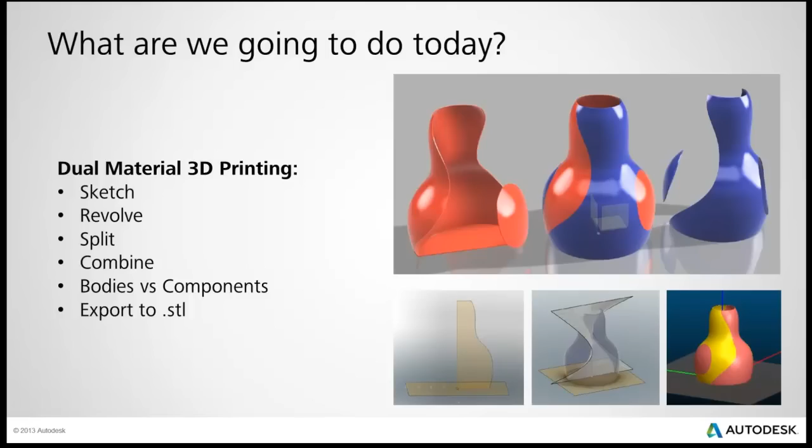So what are we going to do today? It's a class on 3D printing, and we're actually doing a dual material 3D print, which I've never done successfully myself, but James has gotten a lot of practice at it. A lot of the things we're looking at, I won't say difficult, but they're some of the more advanced features someone might use inside Fusion. Other than sketching to create something, we're going to use the Revolve command to create geometry, the split and combine commands to make cool shapes like in the images to the right. We'll talk about differences between bodies and components, and of course exporting as an STL file, which is necessary for your 3D print.

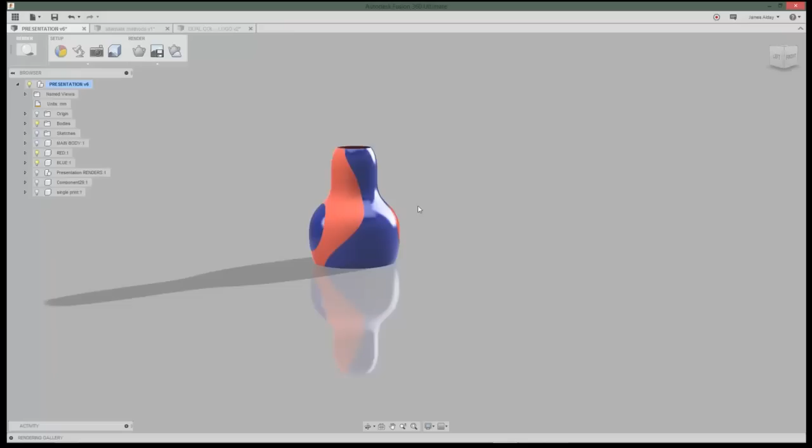So basically, we're going to build a 2-color vase. This can be 2 colors, 2 materials. It's going to be composed of 2 STLs that we're going to export that look like this. And from this, you'd put it into your slicer, and you'd have a dual color print.

Very simple design. I know this is another vase. People are like, oh, not another vase, but trust me, it's all about the technique in building this, and you guys can use these techniques to build whatever you want. So let's get started.

Let me actually start with a new design. That might be better. I'll just follow along with you guys. So what I usually do, and this isn't necessary, but when I was first starting out with Fusion, I'd like to just draw my work area, my printer bed. Again, not necessary, but this might help you guys out later.

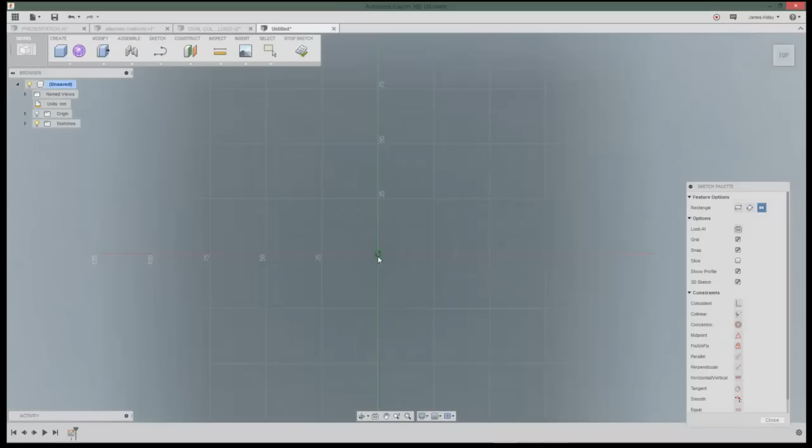So my current printer bed is 200 by 200, which is an 8-inch printer. This will just give you a good idea of the area you're working with so you don't get too crazy. And if you don't want this, you can always turn the sketch off, not a big deal. So let's hide some of this stuff so I can see.

All right, so we're going to start out really simple. Go to our front view. And then what we're going to do is sketch out the vase, so we're going to make something that looks like this. This is the goal of the first step, is to simply sketch out a profile of our vase.

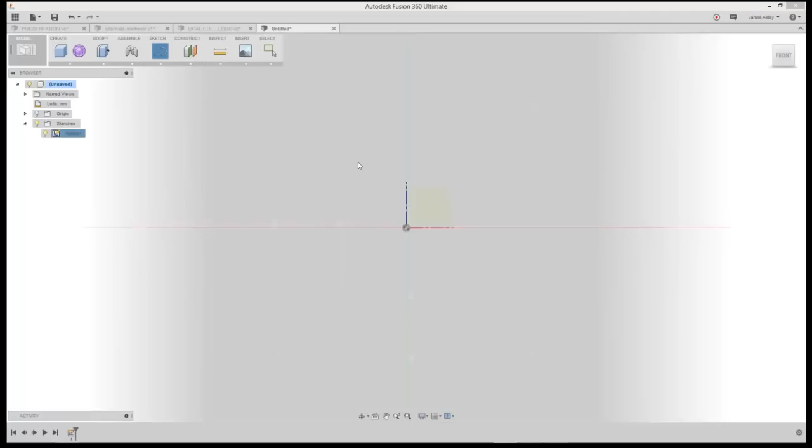So to do that, again, go to the front view. We're going to click on Sketch. We're going to select the line tool, and we're going to click on this work plane. Now that we can draw lines, we're going to start at our center origin and go up about 150 millimeters, should be good, since our print bed is 200. And again, you guys don't have to go exactly with these measurements.

You don't even have to make the exact same looking vase, because the whole goal of this is to split it and make a dual model at the end. So you don't have to follow along exactly. All right, so we're going to go over about, I think I said about 30, somewhere in that area, should be fine. And then we're going to stop.

We're stopping because I need a spline. So now we're going to click back on our sketch. Click at the top, which I lost my line. See, I'm already making mistakes.

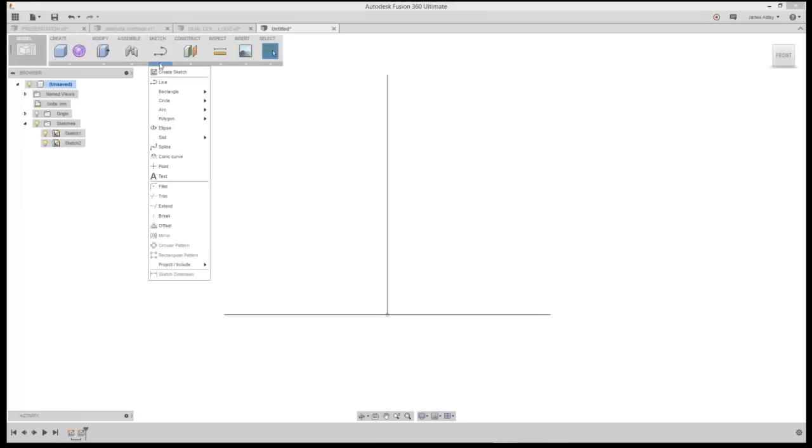You know what, let's do it this way. We can go back to spline. If you guys already drew the line, you can continue on the line. If not, we're going to draw straight out. And if we double click, we can start at this spot. So now we're going to do a vase, come down to, we're going to double click.

Okay, so we have a really ugly looking sketch here that doesn't look like a vase at all, but it's fine because we can just move stuff around. So we're kind of close to what I initially wanted to make, which was this design.

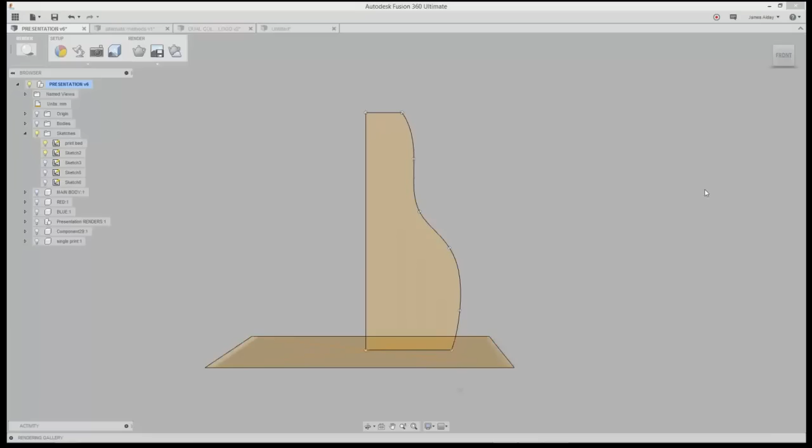So does everybody pretty much know how to just sketch out basic shapes? Is everybody following along okay? No questions so far, so I think you're doing it right. Yeah, pretty easy. Okay, so good.

I'm just going to throw this out there, James. That double click to start at the new point, that's the kind of stuff people log in for. That's awesome. Yeah, let me go over that.

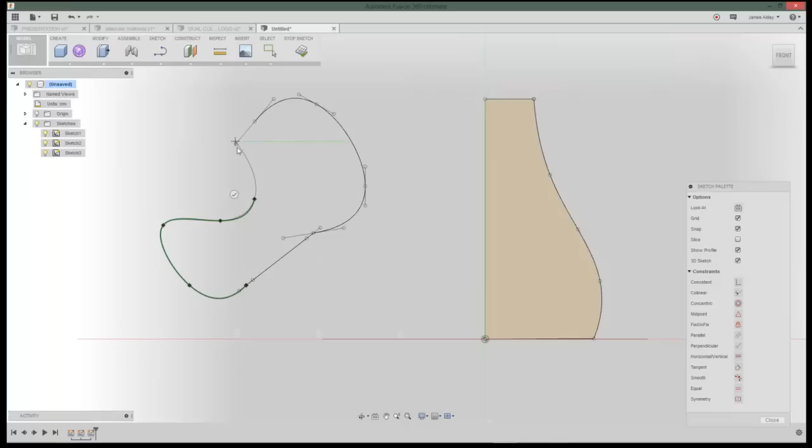So let's draw something out here. You don't always have to switch between the line and the spline. I always just basically stay with the spline and the line. So if you're drawing something like a half circle and you want a straight line, you can just double click, draw the straight line, double click again, and then start over. That way you don't have to keep switching between your line and the spline tool. Make sense?

Yep, okay, so let's get rid of that. We don't need that, we'll just hide it. Okay, so now we have a vase.

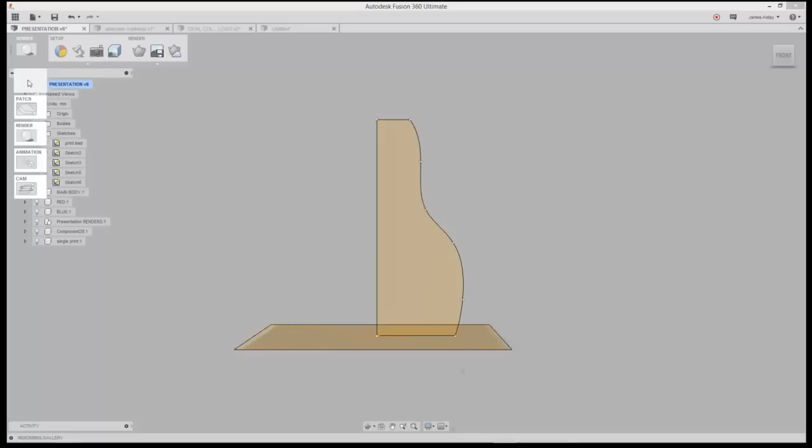There's tons of ways we can make a vase. What we're going to do today is just use the Revolve tool. So to use the Revolve, first of all you shouldn't be in render mode. We're in model mode. Here's the Revolve, or here's our sketch we made. We're going to go to Create, Revolve. It's going to ask us to select our profile.

We're going to select the vase, or the sketch plane. It's going to ask us for our axis. The axis can be any straight line, so in this situation we're going to choose the line in the middle. We're revolving 360 degrees in one direction, and we're creating a new body. We have a couple options in here which we can go over later: intersect, cut, and join. These are all awesome, but we're going to start with new body for now.

My bodies are off so you can't see it, and what we're left with is a basic vase. So to get a basic vase shape like this, we could do the Revolve tool like I said, or there's a couple different alternate ways we could do it.

We could do a bunch of sketch planes. This part of the tutorial I'm going to go through really quickly because I didn't want to spend a lot of time. Basically with Fusion, you have tons of options to do a basic shape. There's a lot of different ways you can approach it, which is cool because each one has their advantages and disadvantages. So we just showed you the Revolve.

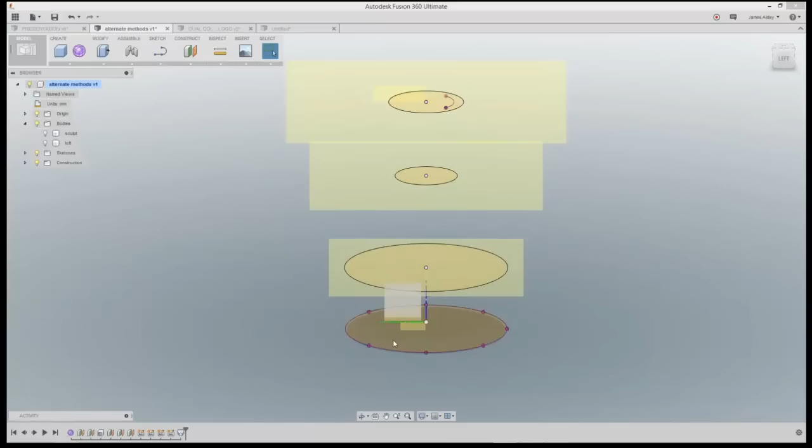This way is the loft. There's a couple great tutorials out there that show you guys how to do lofts. Basically, you're going to do all your sketch planes. Once you get them all sketched out, I'll go over these construction things in a minute. So you're going to make these sketch planes, then go to Create, Loft.

Let's actually start with this one. So when you select all the planes, it'll make the vase. Very cool, because when you're done with this, you can also change the shape very easily. So that's a second way to create just the basic shape of the vase.

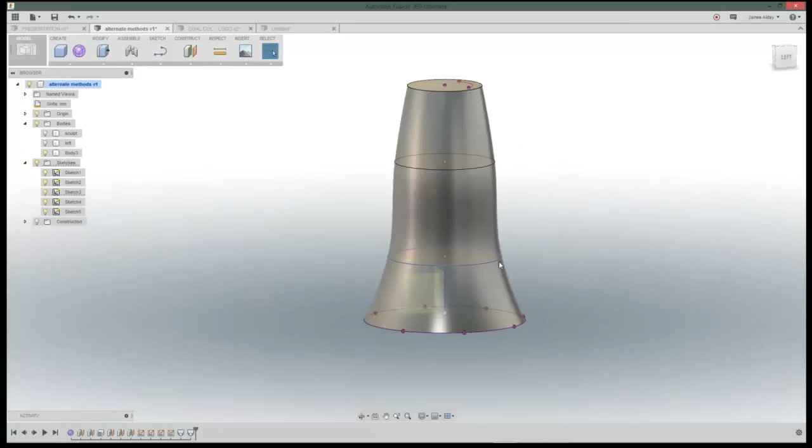Another way we could do it is to create a sculpt, which basically - let me hide this body first. To create a sculpt feature, this is really easy. Let me start over actually. To get this design, we can go to Sculpt Mode, create a cylinder. Again, I'm going really fast through these because it wasn't really part of the tutorial, but I still think it's great for you guys just to see how many different options there are to build shapes.

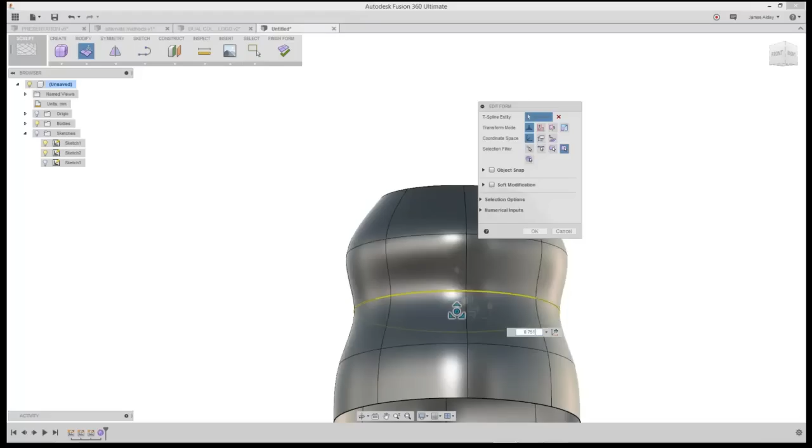So we have a basic cylinder. Then from this, much like the lofts, I can just go through and shape it the way I want. Then we have a couple different options for closing these tops up. There's a vase tutorial - or not a vase, a lamp tutorial you guys done recently - that's really good at showing you guys how to close these gaps up. And if you guys are interested, maybe at the end I can show you how to do that.

So anyway, that was just basically how we can get different shapes. Now going back to our presentation, okay, so we have a basic vase. To turn this into a vase, it's really easy. We can click on the top of the surface. We either right-click and go to Shell, or I believe it's in Modify, we can go to Shell.

So we'll right-click on the surface after we select it, go to Shell. It asks us to select our faces or bodies, which we already did.

And the thickness. Basically with 3D printing, thickness is very important because of your nozzle size. Most 3D printers use a 0.4 nozzle. So if we did 0.4 here and tried to print it, it's only going to do one perimeter, which could be bad if we have some real strong angles in here. It might not be able to build on itself.

So typically you want two or three lines drawn, so you have to multiply that. I would say usually one's pretty good. You can squeeze two or three out of that, depending on your slicer settings.

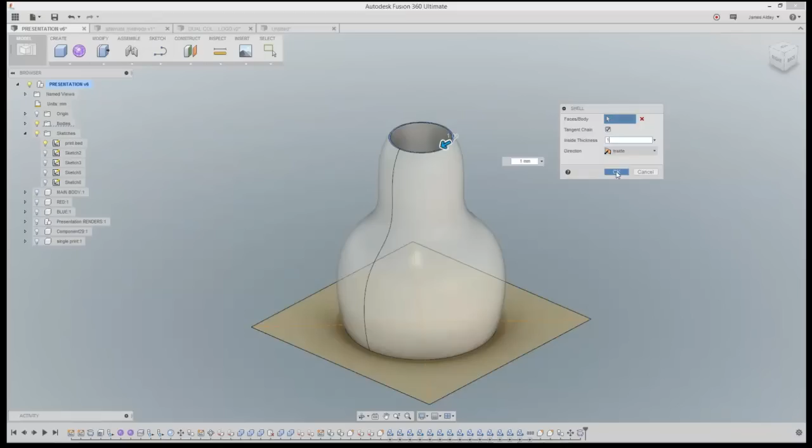Say OK, and then we are left with a very basic vase. Simple enough. I think if you guys are here, everybody knows how to do this for the most part.

So now you have a printer with two extruders. You just built this cool model, and you're like, okay, what can I do to this to make it dual color? Typically in the past, we would print this out, pause the print, switch our filament, and then we'd be left with color changes in a horizontal pattern. So I thought it would be cool if we could make the color changes diagonal or some decorative pattern, or inlay text or shapes, which is exactly what we're going to do today. We're going to make it look like this, without that ugly part in the middle.

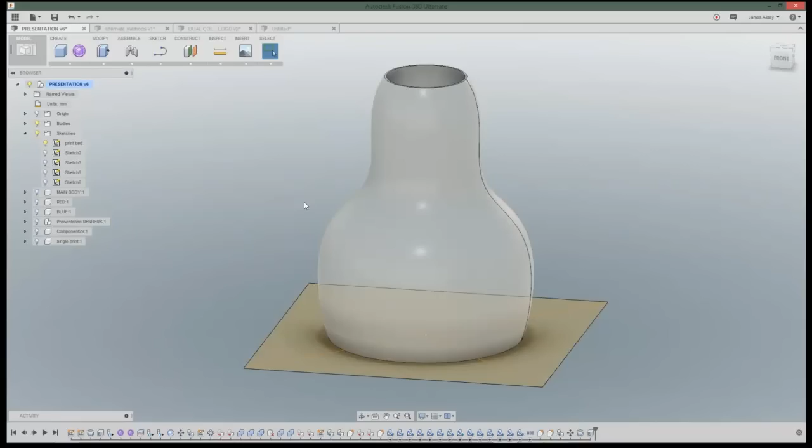Okay, so to split this up, when you split models, it doesn't necessarily have to be for dual extrusion. It could be because this vase or model you have is 4 foot long and you want to cut it up into 200 millimeter sections. So to split it, we have a couple different options.

What I like to do, here's our split options, which are in the Modify dropdown. To use these, you can see the red tool it's using, it won't let me go there. Basically, it's going to want us to select a tool. Well, currently, we don't have a tool set up, so we're going to build one real quick.

So we're going to build a tool that will give us just a cool shape. I like using, in the Sculpt environment, there's two ways to get into Sculpt. You can either drop down into the Sculpt menu, or you can just select Create Form, which will automatically put you in the Sculpt environment.

It's really quiet out there. Everybody doing all right? So far, so good.

All right, so getting creative, making kind of cool looking cutting tools, the Sculpt environment's definitely where you want to be. Sculpt gives you tons of really cool features. You can shape organic shapes, just make really nice, cool, wavy stuff.

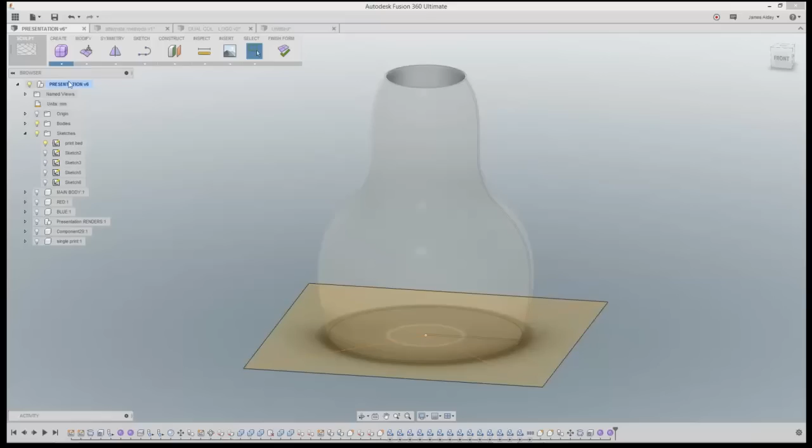I love the plane, so what we're going to do is select plane. Again, clicking on the front is probably the best way so you don't get too lost. You're going to make sure your origin is highlighted if you happen to turn it off for whatever reason. We're going to click on the plane face right here.

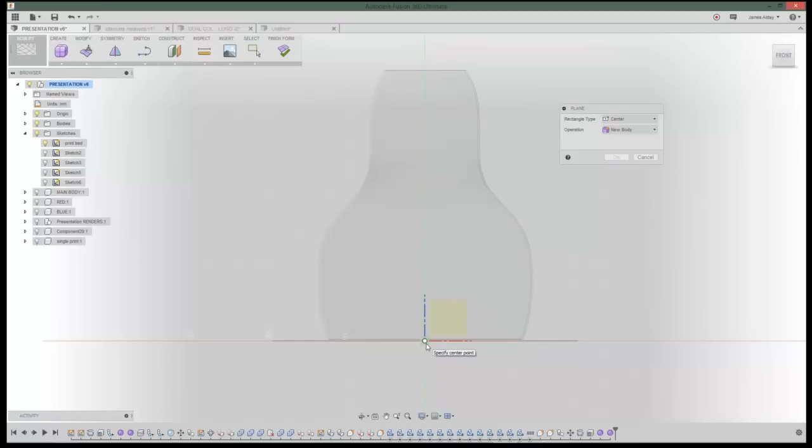I believe that is the XZ plane, I'm not very good with the planes. Click on our center origin. It's very important when you're doing dual extruders to try to keep everything built off the center. It's not completely necessary because you can always align stuff later, but it's just easy while you're modeling for a specific purpose to keep everything aligned as you go. So clicking on the center, we're going to draw a basic plane around our shape.

I didn't specify anything specific, just make sure it covers the entire vase area, and say OK. Actually, before we say OK, we're going to add another division in here. I believe that would be... nope, I was wrong, that's going to be in the width. So you're going to change your width faces to 4. Basically, length and width, all it does is divide the shape up, so you can play with that, put as many length and width separations as you want. But for right now, I just want one in the middle and one on the side. Say OK.

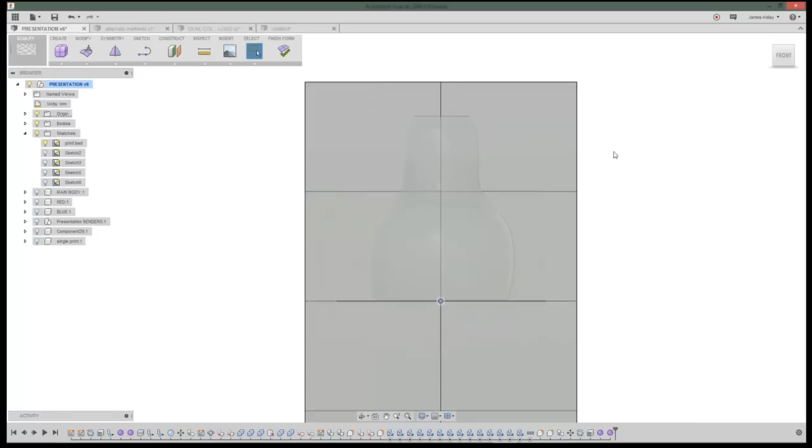Now we don't need this portion down here, so you can kind of highlight it and just hit delete on the keyboard. My computer is dragging a little bit.

Okay, so now we have a basic plane right through the middle of our shape. We could stop here and split the vase like that, and we'd have one color on each side.

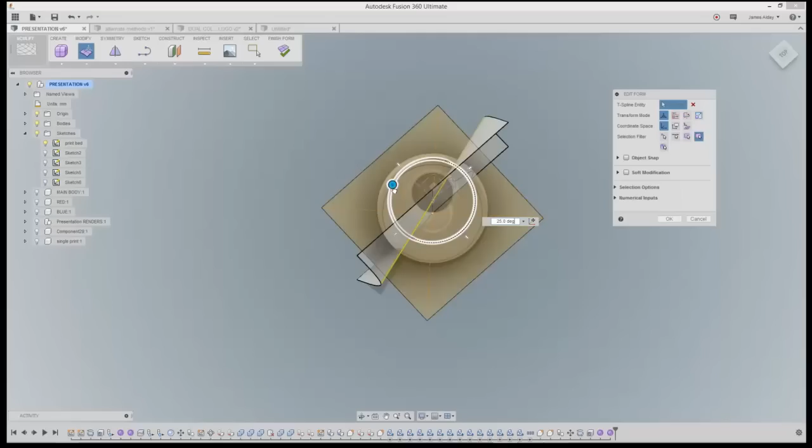But something cool to do is hit modify, and you can modify this shape. I like doing kind of twisty stuff, so you click on the center, double click the line, and that'll select the entire line. If you rotate towards the top, you can see the revolve tool on the side. So we can revolve that. This looks like it's somewhere around 25 degrees, something like that should be fine. So we get this cool twisty shape.

Is this on your screen the whole time? Can you guys see this part, the GoToMeeting thing? On my screen I can see everything. Yep, it looks like everyone's good.

Okay, maybe I should move that. So once we get the basic shape, we're going to hit OK.

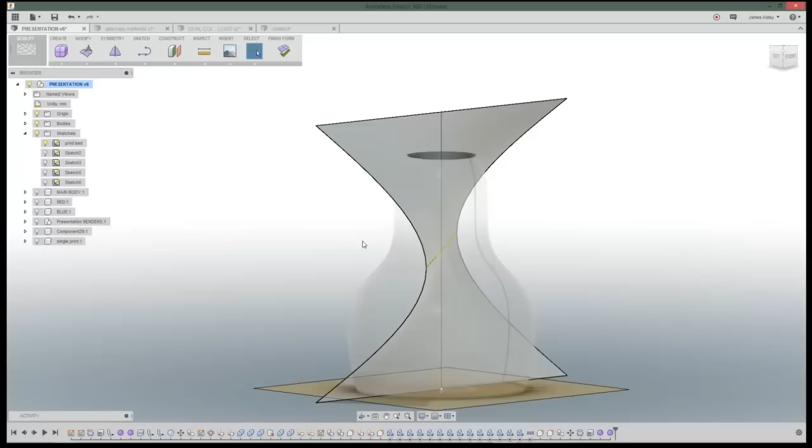Now what's great about a plane, when you create a plane like this, it doesn't really have a dimension to it yet because we haven't thickened it. So it's cool because when we cut this model, it's not really going to affect anything, we're not going to lose anything from the model. It's just strictly going to cut it.

Hey James, could you show the spline revolve one more time? Sure, you know how we revolved the profile in the beginning? Is that what you're talking about? No, just the plane revolve. This part, yeah. Sure, okay, this is really cool.

I've done some really awesome shapes just by playing with the plane. So basically, we're going to modify. You can use modify with any of these tools that you create in the Sculpt environment. This is basically how you're going to alter the shape.

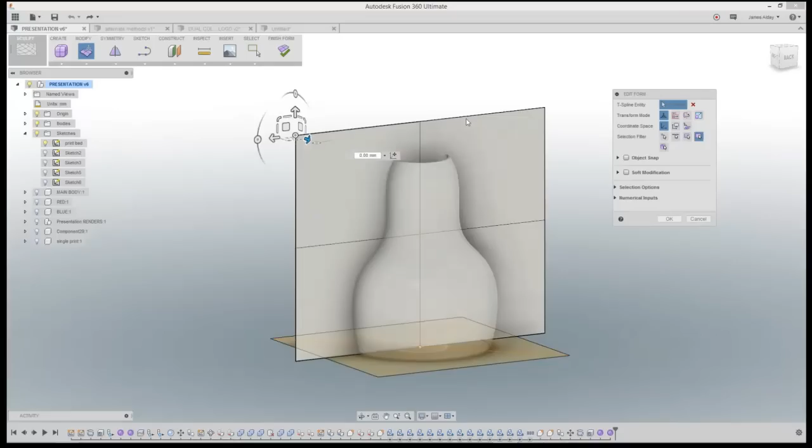So when you click modify, you can click on points and move those around to change the shape. You can click on the entire surface and move that stuff around. In this case, we're going to double click on the center, which is basically going to divide our shape up.

And all I did was move towards the top view so I could see this little revolve tool. We're going to click on that and just revolve it, whatever you want. 45, 50, 60 degrees should be fine, just enough to give it that cool split shape. That's really awesome, a creative way to do that.

Thank you. Okay, so once we get the little split in there, we can say OK. And now we're ready to split the model.

Remember I said earlier about hiding this box? We really don't need that anymore because we already have our vase set up. So just to limit the confusion, I'm going to get rid of that. It makes everything a little cleaner.

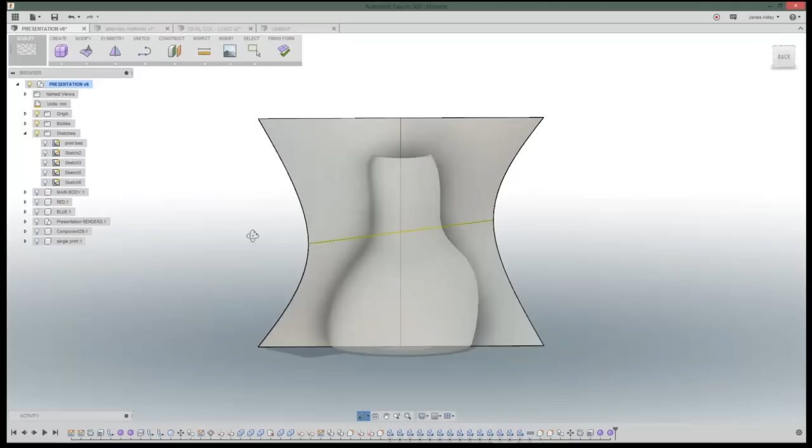All right, so now we're going to split this. To do that, it's really easy. Oh, first, sorry, we have to finish the form because we're done modifying, we're done building our tool. We're going to hit finish.

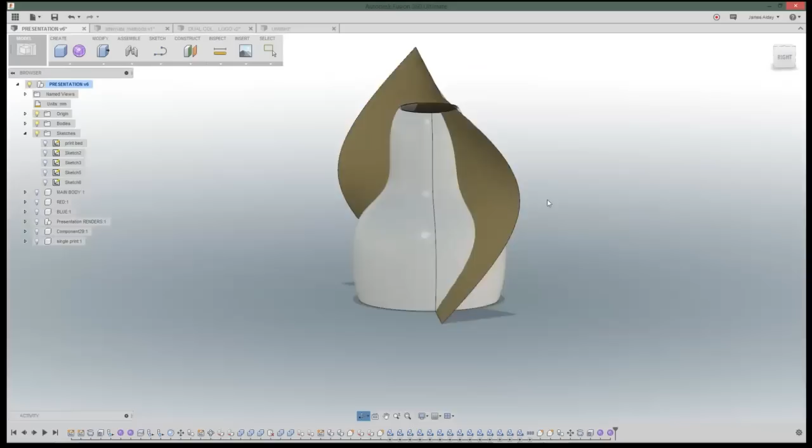All right, so now we're left with this cool tool that we created that we can split this vase up with. And this tool, again, can be anything. There are lots of 3D parts other people make that interlock, like some cool swords where people have snap-together pieces. To make those interlocking pieces, they just built a tool with triangle intersecting parts and used that to chop up their model, sort of the same technique we're about to learn.

So we're going to go to, I believe it's in Modify, and select Split Body. We have Split Face, Silhouette Split, or Split Body. In this case, we're going to split the entire body. Definitely play around with the others.

So the first thing it's going to ask us is the body to split, so we're going to select our vase, or the model you're currently working on. And the splitting tool is the plane we created.

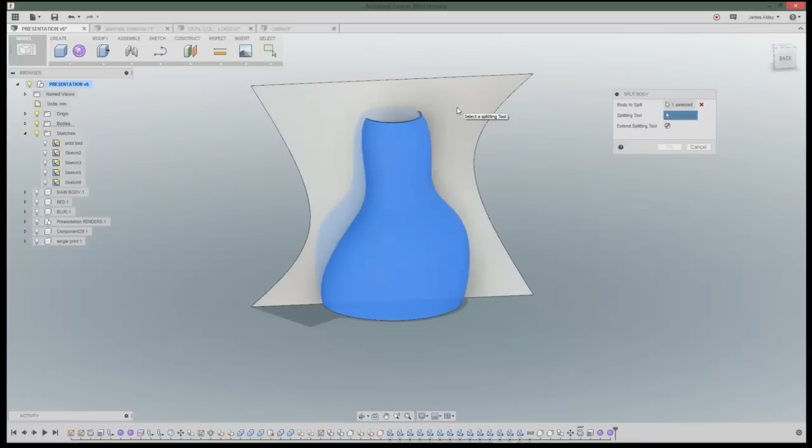Extend tool - this option is really good because sometimes if you had a flat plane that was really small, that only took up a small portion of this model, you could hit extend and it'll extend it all the way out, virtually. So if you had just some small surface you're using as your cutting tool, it's still totally movable and it'll extend it all the way out past your model. So in this case you can have it on or off. It really isn't going to hurt anything, but we'll leave it on.

Then we're going to hit OK. You're still going to see all this stuff in here, which is fine. You should now be left with 2 bodies in your browser. And if you go to your browser and expand the bodies menu, yours doesn't look like mine—mine has a bunch of extra stuff in here, which I should have thought about before teaching you guys. So basically, you should be left with something that looks like the 2 bodies over here.

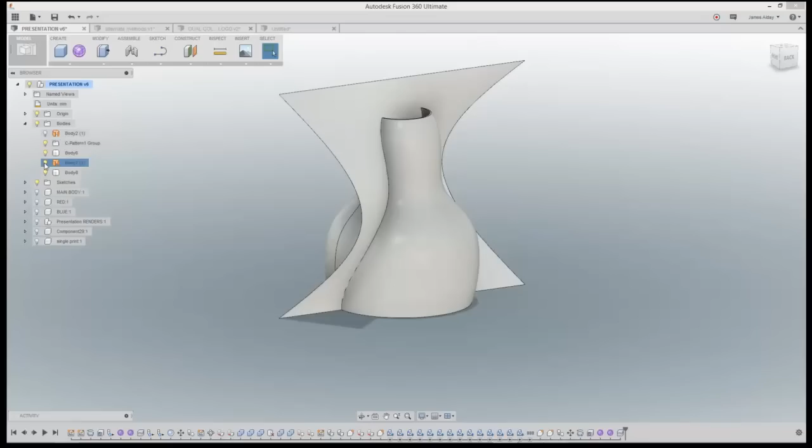Okay, it should look just like this. This other split in here, there's nothing to worry about—that was because it was a mess I did earlier. Why is there another split there?

So did everybody else's come out looking correctly? Anybody having issues with that? Everybody's good? Yep, one person said they have it.

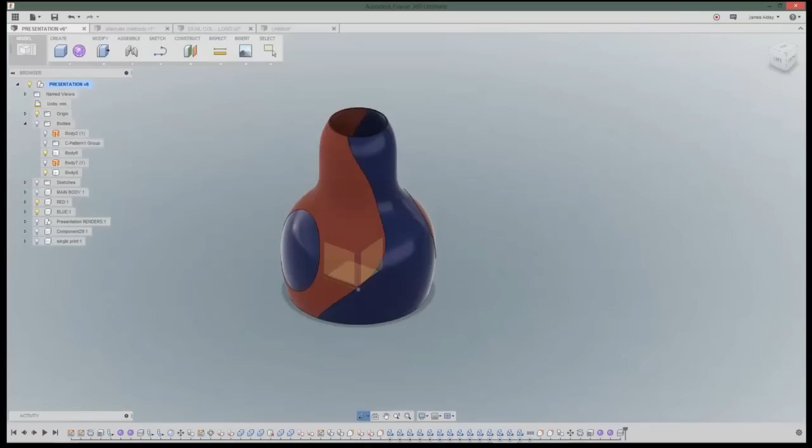Tamara says it's not an extra split, it's the Revolve seam. Awesome, thanks Tamara. That's exactly what I thought too, but I got nervous. I didn't want to say anything because it looked like it was selectable, and it shouldn't be selectable. Let me see if I can go back and look at it. I was like, oh, it's just Revolve seam, nothing to worry about. Then I'm like, wait a minute, why is it selectable? So I don't know—let's see if I can turn it off. Okay, she's absolutely right, because I can turn it off. Thank you, Tamara.

Okay, so just to prove her point, yes, I have two bodies, and I can turn them on and off. And there was my seam that was scaring me. Okay.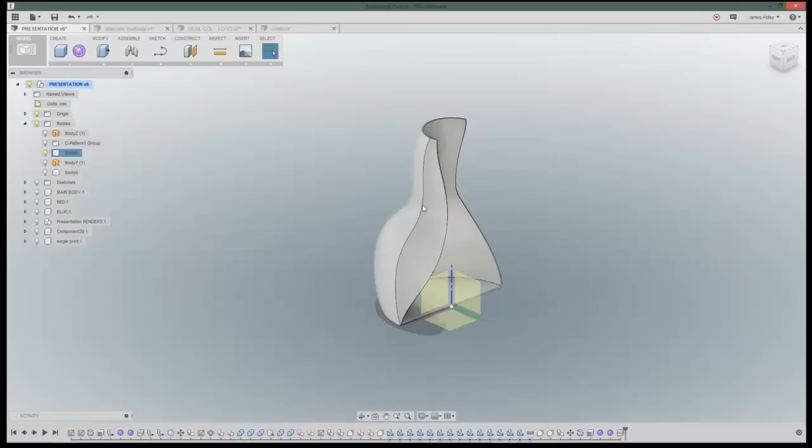So that is the very basic way to split a model. We could stop everything here and call it a day, and export or send both of these out as STLs and send them to our printer. And that's basically it. But nobody wants a boring vase, so I thought we could do some other cool stuff, like show you some other tools that will allow us to split this model up even further.

So to do so, I thought we could do maybe some little patterns on the side, which could be anything—any basic shape we have available, or we can draw, we can project stuff, which is maybe getting a little further ahead of ourselves. But I figured the easiest way to do it for now is just a circle. So our goal is to make it look like this—we're going to do a circle cutout, which we can assign a different extruder to.

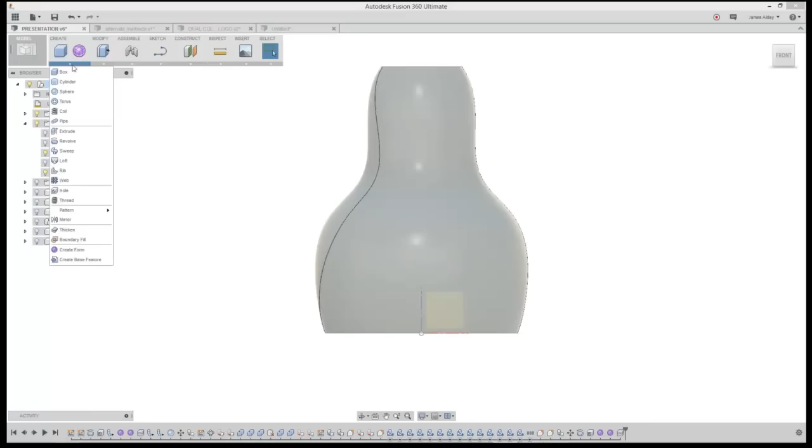So very easy, we'll go back to our front view just so we know where we are. We can put any object, any tool out here that we want. So we're going to do something simple and drop down to select a sphere. Again, we're going to work on the same plane we've always been working on. For this, you can kind of draw this sphere anywhere because we're going to move it in a minute.

Of course, I can't see what I'm working on. If you can't see what you're working on, you can hide the bodies over here just to see the sphere. 60 to 80 millimeters, or whatever you guys want, should be fine—just enough to give us a nice surface area to work with. So when we create a sphere, it's basically asking us what diameter we want. We can change that down here as well.

And commands like, if we're going to join, cut, intersect—intersect is awesome, I'm going to show you guys some cool stuff to do with this later. So for right now, new body, choose a size, click OK.

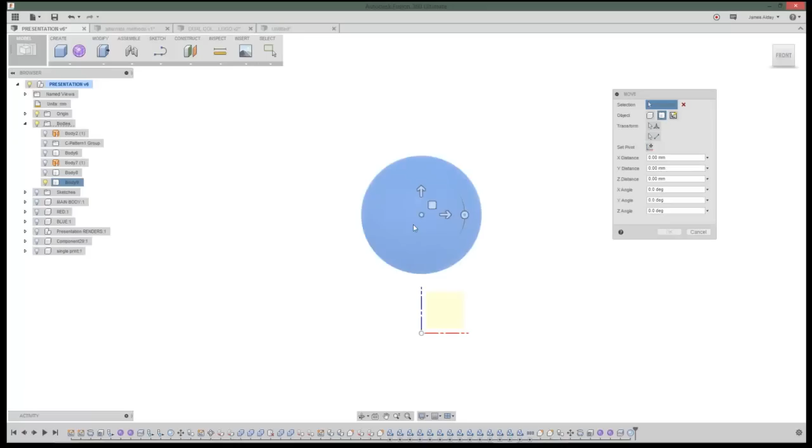And we're going to move this to the side. Go ahead and select it, hit modify, and move—this is also available if you select the body and drop down to move. Then simply grab the right arrow and kind of drag it to the side a little bit. The reason we dragged it to the side is we're going to position it on the outside of the body here somewhere.

Probably easiest to go to top view, so we look straight down on the top. What I kind of want to do is have this in between, or kind of in the center of our body, so we see the splitting line, the curve going this way. So we're going to put this somewhere over in here.

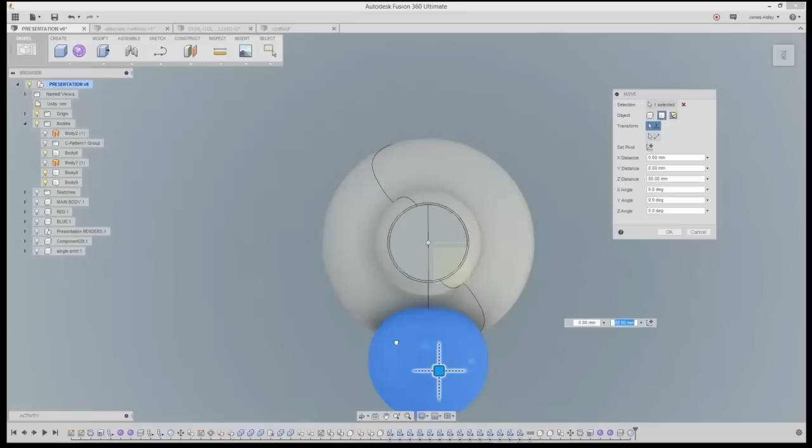It doesn't have to be exact, because I don't want to focus too much on making things perfectly exact at the moment. So once you get it roughly where you think a cool shape would be, you guys can move this up or down, wherever you want. It doesn't matter. Where it's in a cool spot, you can click OK.

Everybody got that? Pretty easy stuff. So now we're going to put this on the other side as well. There's a couple ways to do that. We could mirror it over there, but when I was doing this, I realized that I don't have a good mirror plane. I can see my origin down here, and if I try to mirror that, it's going to give me issues.

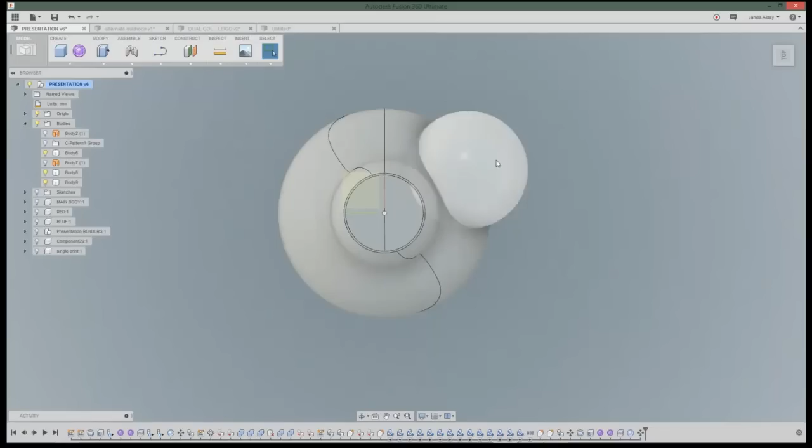So what I can do, something I've done in the past, is called circle pattern. Let's do it this way. Let's go to Create. Once you have your shapes laid out here, go to Create. I have a lot of stuff open right now, so my computer is not liking me. We're going to create a pattern, and we're going to create a circle pattern. This is my other favorite tool that I use all the time.

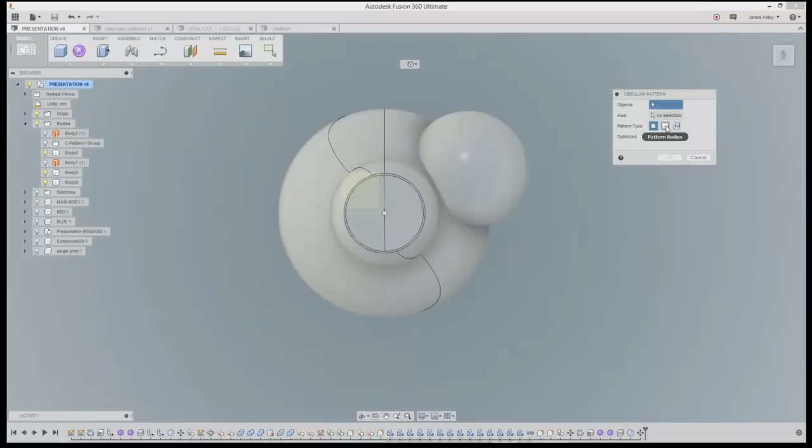Now this is going to ask us to select the object, the axis, and basically what material we're working with. This pattern type is very important. We want to make sure, because we're wanting to select this object, that we have the body selected, not the face. Because we're not going to pattern just this face around, we're going to pattern that whole body around. So first start out by selecting the bodies, select your circle, and select the axis.

The axis is going to be the center point, but we want to make sure we move our model up a little bit so we can see that blue line, and select the blue line. Do you guys see that? So basically there's the blue line in here, which is, I believe, our Z line, or Z axis. So we're going to select that blue line, and it's going to default to 3 quantity. We don't need that. Just go ahead and change it to 2.

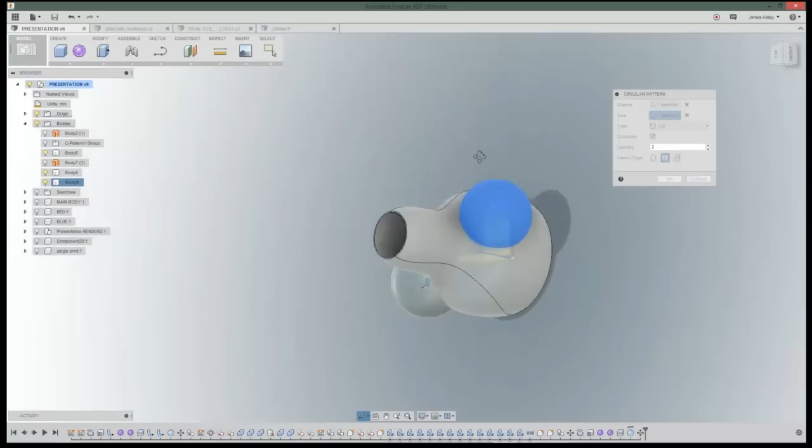Now basically what that did was 180 degrees in a circle. It put it on this side, which in this case was exactly where we wanted it to be. So this is basically only going to work with symmetrical shapes. Then we're going to hit OK. What that did was created a pattern group. We just created these. So now we're going to have actually 3 circle shapes, which is fine because we can always hide one later.

Everybody good? We got that? You can see the 3 bodies. So now we have 4 that we're working with. We have the 2 halves of our vase and the 2 spheres. Looking good.

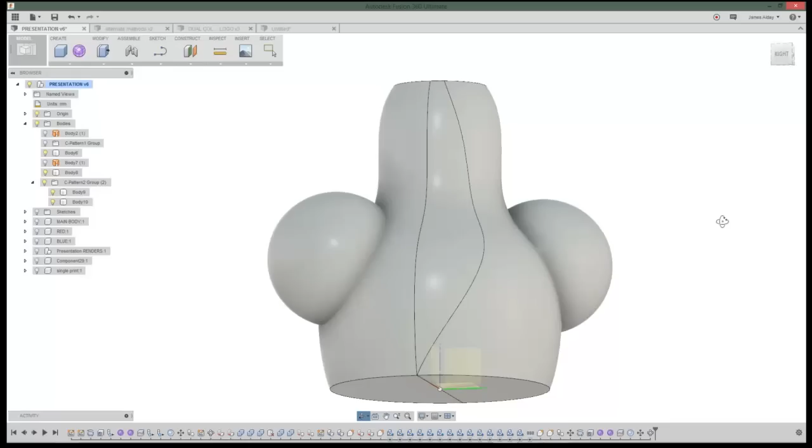Awesome. Okay, so this is another cool tool I like to use all the time. This is where we're going to combine. Combine I use on every project because there's so much you can do with it. Basically, you plan ahead and you create some sort of a tool and you can combine it into your model. Use it as a cutting tool.

You can combine it, join it into your tool, or you can intersect. In this case, we're going to intersect. And I can show you what that means here in a second. So to start out, we're going to go to Modify, Combine. Bear with me one second. I just want to make sure I tell you guys the right way before we go any further.

So when we combine, it's going to ask us for targets and bodies, or targets and tools. And then what operation do we want to do with those targets and tools. So what's really cool about Fusion 360, and I haven't seen it in other programs I've used, and I could be wrong, so I'm sure they're out there, but just the ones in particular that I've used, is this Keep Tools feature. Keep Tools has saved my life.

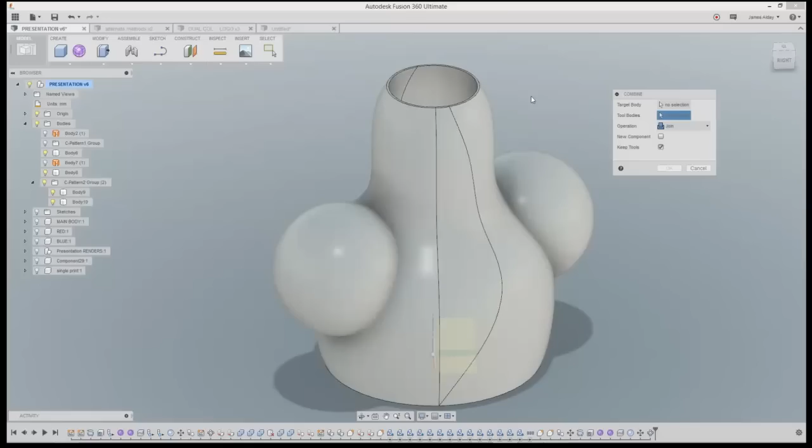It saved me so much time because typically I would have to plan ahead and make copies of the tools ahead of time because I would know that I'm going to lose what I'm fixing to combine. So this is great because it allows us to keep it. The goal of this is to keep the vase. I don't want to lose my vase. So you can see Keep Tool is the vase. So in this situation, my tool is going to be the vase. My target body, which I'm going to lose, is going to be this sphere. It can be either one because we're going to do the same to the other side.

So by default it has join, because it thinks you want to take this shape and join it to this shape, merging them both together and getting rid of all the intersecting stuff. We don't want that. We have the option to cut - cool feature, it'll take this circle and basically cut the vase out of it. We don't want that either. We want to intersect.

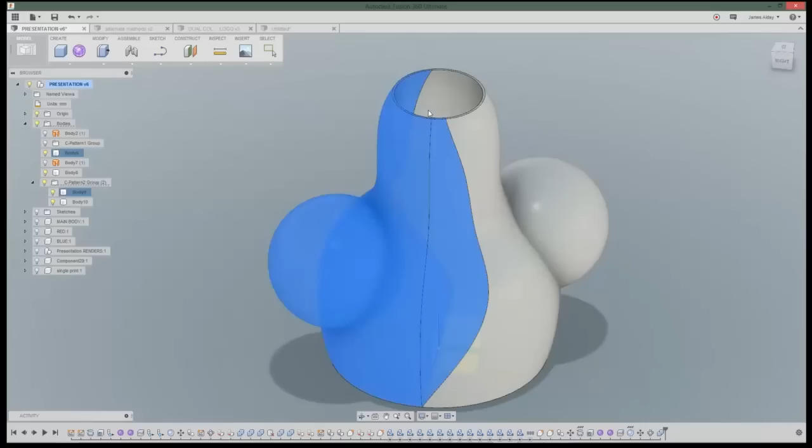So when we go to intersect, we're going to hit OK. All right, so we lost the sphere, which is completely normal, I knew that was going to happen. But what we were left with is the part of the sphere that was touching the vase. It's another body it created, basically laying on top of the vase. You can see we have these conflicting shapes in here because we have two exact bodies laying on top of each other, which is exactly what we wanted to do.

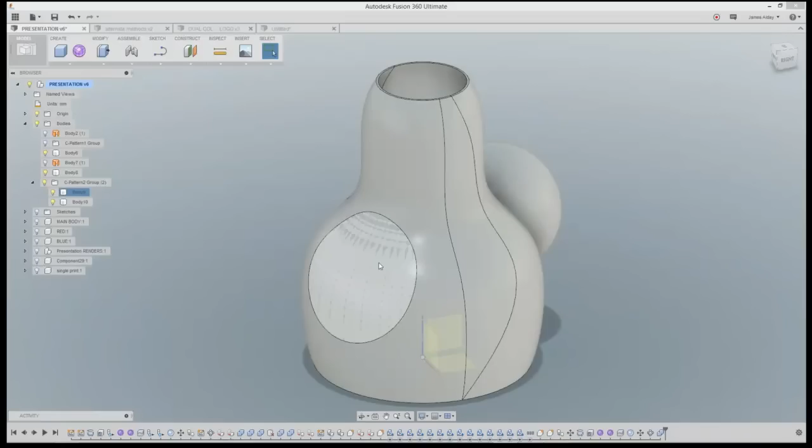I can hide it and make it come back. So now we have the shape that we want to basically cut out of our vase. We're going to repeat the whole procedure again, but do things a little bit differently.

We're going to go to Modify, do Combine again. This time we're going to cut this circle out of our vase, and we're going to keep it because we don't want to lose it in the process. So a little reversed this time - we're going to say our target is the vase. I want this vase, and I want to cut away this tool, but please don't delete the tool. So we're going to say keep the tool, and we're going to say OK.

So now there's no more conflicts, and if we hide that structure, it's gone. So now we have a hole in the vase.

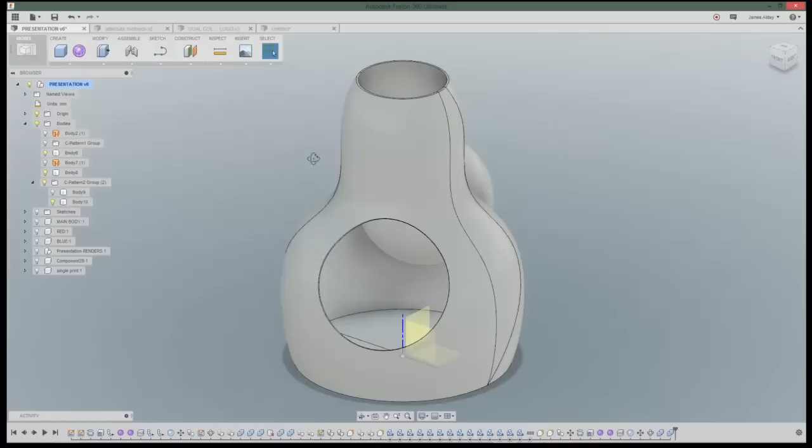So that's it, this technique - you can do text, you can put people's names in vases and cut them out. Lots of different ways. You can do the same thing we basically just did by drawing shapes and extruding them through there and choosing intersect. There's tons of different ways to approach this, but I basically wanted to show you guys some combine and intersect stuff. So go ahead and repeat the process for the other side.

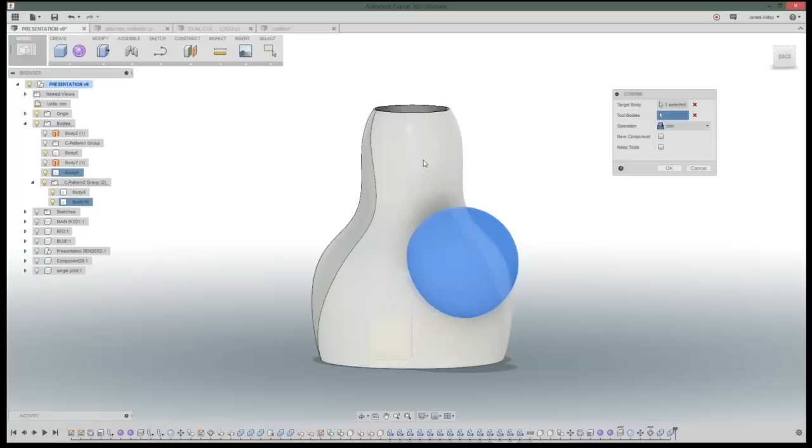We're going to go pretty quick this time - go Modify, Combine. We're going to select the sphere as the target this time, and the tool body is the vase. Keep the tool, and we are going to intersect. Again, the vase was the tool, sphere the target. Make sure you have intersect and keep tools, hit OK.

And now we're left with this same thing as before, the conflicting shapes on top of each other. We're going to repeat the process. If you guys are repeating tools a lot, you can easily right-click and say repeat combine - that's basically going to repeat the last thing you did. Very handy, so you don't have to keep reaching back up here.

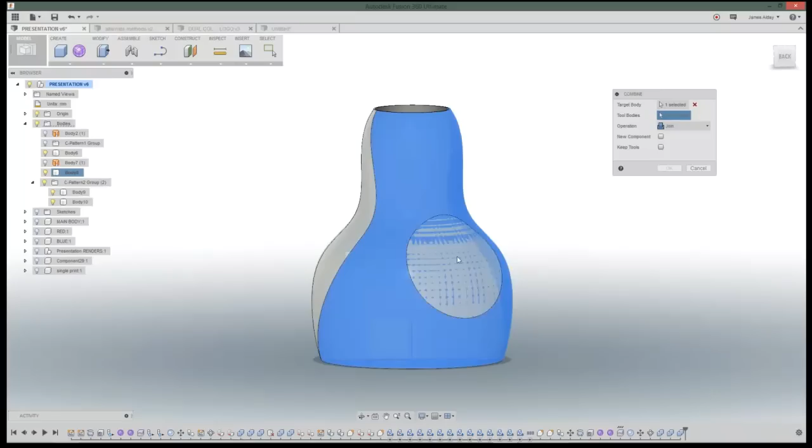So again, that was just right-click, go to repeat. This time a little bit different - we're going to select the vase as the target, the circle as the tool. We're going to cut it away and say we want to keep that shape. And basically we just completed the whole project - we have four bodies that we can send to a printer and print them out.

But how are we going to export those as STLs? Lots of programs - I know people get confused with the whole browser section over here. In other programs you would just go File, Save as STL, and it would send all these to an STL, which is cool, but we're going to divide these up into two different colors.

So from here, lots of people like to just render stuff, which is cool. I'm going to show you basically how we're going to use render to figure out how our 3D print is going to look in dual color, because it's going to help us out later if we can assign some properties to these, so that way I don't get confused when I'm trying to make all my components over here on the side. So let me see here.

So you guys, I'm going to jump ahead a little bit. You have all this stuff here on the side, all these extra sketches, all these extra components that I've made. We're going to start out real quick by discussing bodies and components, and then from there we'll go back into what I was talking about with the renders and the colors.

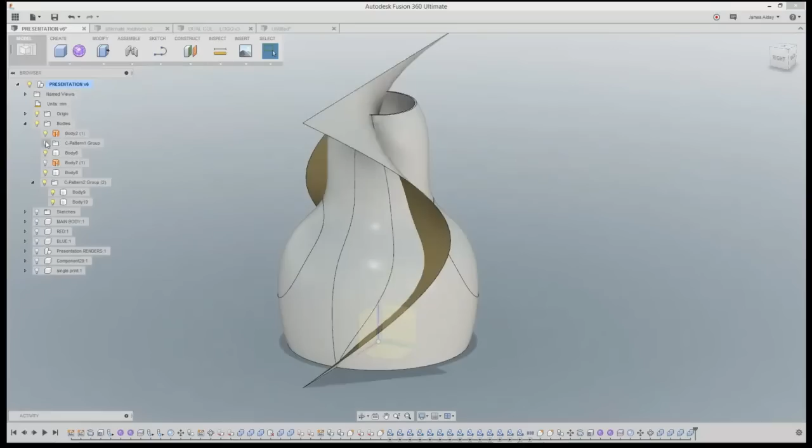Right now on your screen, you have bodies, and you have a bunch of bodies in here, which are basically all the tools that we worked with along the way to get to our final project. All these, usually when I'm doing a project, everything that's in this bodies menu, it's not really part of my project. These were just tools that I used along the way. As I create useful bodies that I know are going to be the finished product, I usually assign them into a component. As I'm creating more bodies in this section, I'll start moving those to their proper components. So components are important because we can have multiple bodies in a component.

And then when we're done, that gives us the ability to save as an STL and export just those bodies that are in that component.

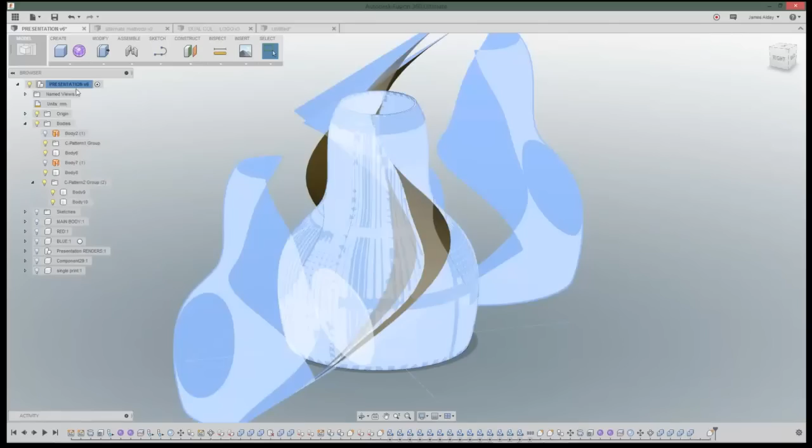A couple ways to make a component. You can either right-click on one of the bodies you're interested in and say create a component from the selected bodies, or what I like to do is just go up to your first header in your browser. Mine's called presentation, I assume you guys have Untitled since you haven't saved it yet. You're just going to right-click up here and say new component. That's going to add a component to the bottom of your list. You can click on that and rename it - we can call it Color 1 or Extruder 1 or whatever you guys want.

And then we're going to take one of these bodies of the vase and we're just going to drag it down into that component. We can test that by turning the component on and off to make sure it's there.

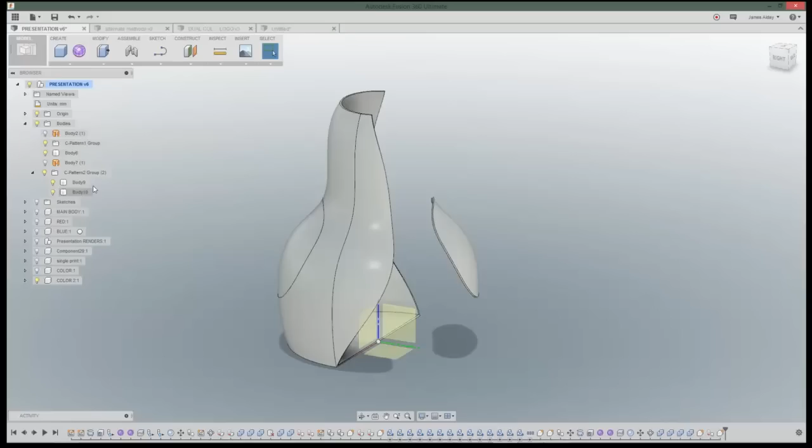Awesome, so now let's do that again. Right-click on the title header and say New Component. Click on that to rename it, call it another color, color 2, or Extruder 2, color 2, whatever you guys like. Same thing, we'll drag that other vase body into that component. We can turn it on and off to make sure it's there.

Awesome. Okay, let's not worry about these little circle pieces right now, because say this is a big project - I just sliced this up into 50 little pieces, and I have a huge list of bodies over here on the side, and it's going to be difficult for me to go through and figure out which body goes where to try to send them to a certain extruder. What we can do, just to make things a little easier, is to assign some properties to these components.

Let's assign some colors in there just to make things a little bit easier. This is another great feature of components, because if we go to Modify and change the appearance, we have the ability to drag. We're going to go through and find some colors here real quick first. Probably plastic is best - I always play around in translucence just because it has ABS in there. I like to think that I'm actually assigning ABS properties.

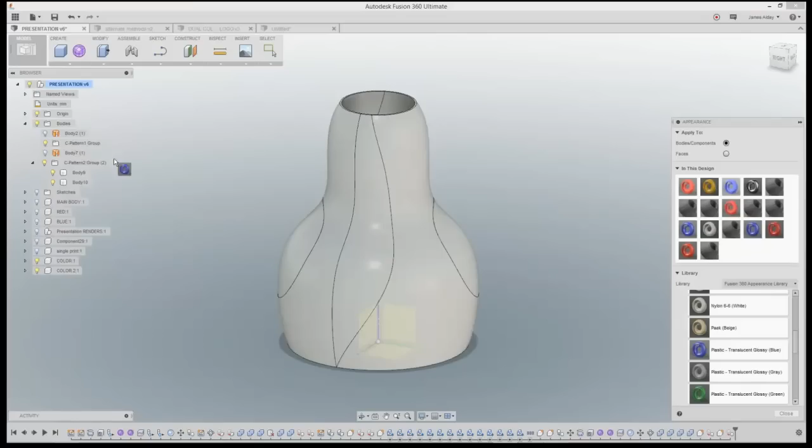So we're going to select a cool color, and we can either drag it to the body, which is definitely an option - you can do that - or you can drag it to the component itself. This is cool because now everything I drag into that component will be assigned that color. I don't have to go through and change each individual body.

So if I have a whole bunch of bodies up here, I could select a whole bunch of stuff, drag it into there, and it'll change the color for me, which is going to be handy because, let me turn that back off so I don't confuse you guys - it's going to be handy because when I select the red color here in a minute, we can easily assign these colored circles to the places they belong.

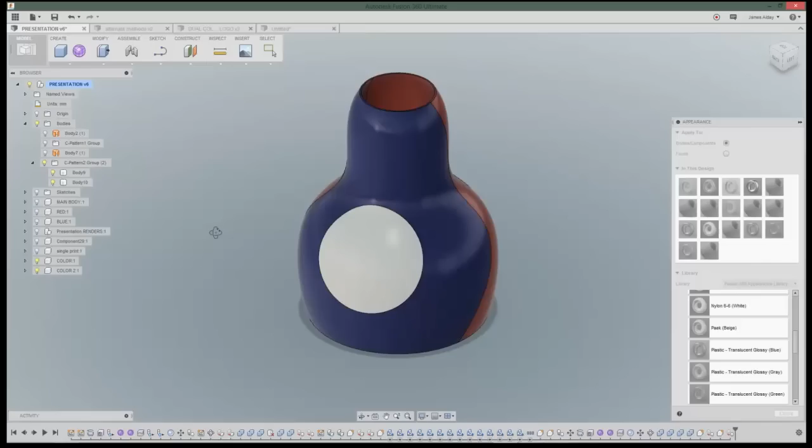So now we're going to assign a separate color. Now we're left with a 2-color vase and these 2 unassigned circles on the side. So now we can easily - you know what's even better is if you guys name these like blue and red, that way we really know what's going on.

Still good? Everybody keeping up?

James, I was expecting you to interrupt me way more often. You've been doing such a good job of explaining that I don't think they have a ton of questions. They did have a few that I've addressed, but nothing that I think you need to show off.

One thing I will talk about briefly though is that someone was talking about adding text onto the curved surface. Like you mentioned, you're able to do that to the vase to customize it with someone's name or whatever you want on there. Their main concern was that at times when you project it to the surface or extrude it, depending on the curvature, you can get some skewed text, so the letters become skewed.

Yes, and we can definitely go back to that. Do you have any experience with that, James? I do, and there isn't, as far as I know, and from the people I've worked with on it, there isn't a great solution just yet.

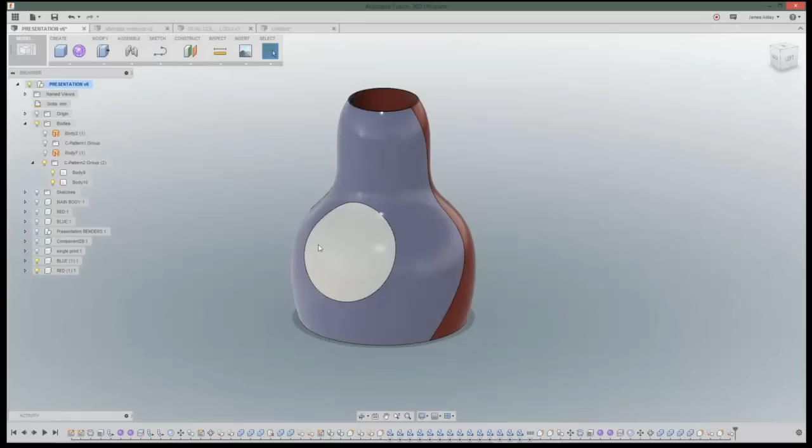And we have project to surface, right? Right. So you can do the text, explode it, project to surface, then you can keep it uniform shape. There's like two options for the text. I've had pretty good luck putting text on the surface, so we can play with that here in a second.

I know oftentimes when it's wrapping around an entire cylinder, they can get a little bit bent, but usually with a little bit of effort, you can get them to look pretty good. But go ahead, keep moving on.

Okay, definitely. So what's cool about having components assign colors and properties, like I said, is that if I have a whole bunch of bodies up here, which happens every time I try to do a project, there'll be literally 30 or 40 different bodies I have to go through and figure out which one goes to each extruder.

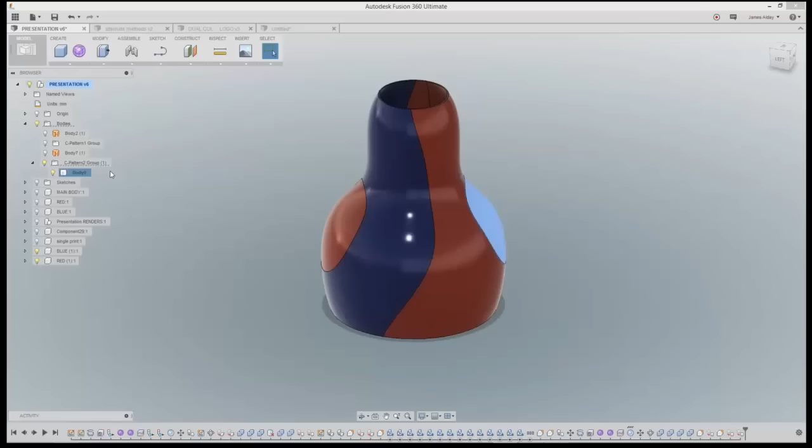If you hover over it, you see it highlights, so I know I want this one to be red. See how the highlighted body? If I know that I want that to be red, I can easily just drag this into my red and it changes to red for me. Same thing with this one — it's highlighted, I want it on this extruder, so I'll drag it down to the blue.

Quick trip into render mode, and this will just show us basically what we have. Very simple — we started out with a solid vase, split it up into two halves, and then did some creative stuff to add some dimension to it.

I can turn each one off just to see basically what our slicer is going to see. It's going to see this as one component or one extruder, and this is our second extruder, and our finished product. So pretty easy, really basic.

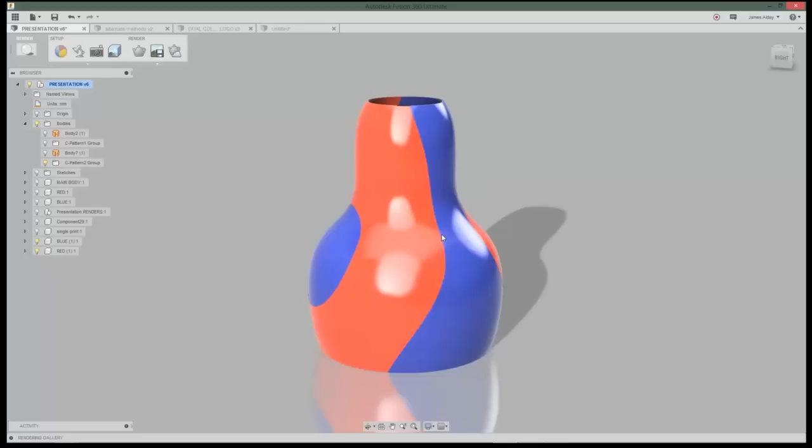But you can use these tools to split stuff up to do some really complex and cool shapes. So I threw together a couple in here to show you guys — this is why my presentation is running so slow, because all these are loaded in the background. Maybe not the smartest thing to do, but we got through it. I like it, that's awesome.

So here's just a couple quick examples of some weird vases and stuff that I made. This one's kind of cool — all these little ridges are on the outside, and it's two different colors, or two different extruders.

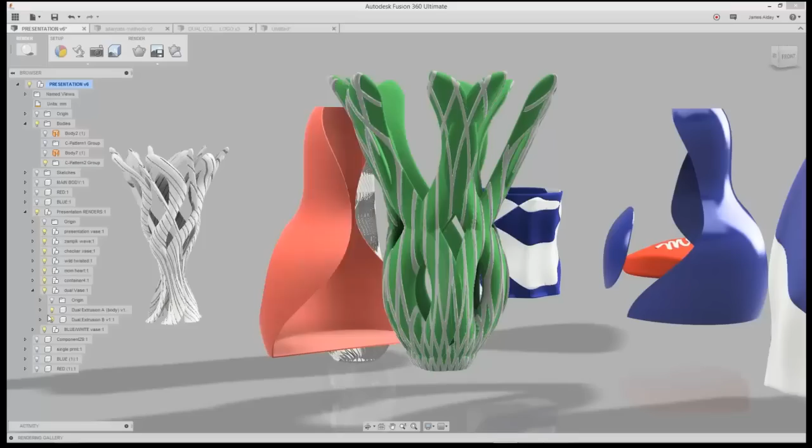Let's see if I can find which one that is. Here we go. So you can see what I was talking about, all these little individual bodies that I had to click and drag into the appropriate container or component. It got kind of messy, but that's one.

This other guy over here, sort of the same thing, same technique — two different colors, two different materials.

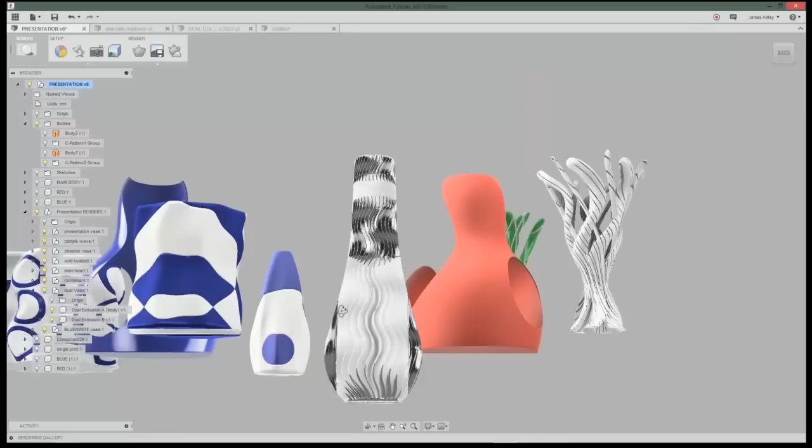This, you guys have all seen — this is a vase developed by a user called Zample, really popular. You see everybody who 3D prints usually tries to print this vase. I took it and did some extra stuff to it. Let me see if I can turn off a lot of this stuff so you guys can see.

Okay, so this guy turned out really cool. If I render stuff on my side, are you guys seeing it in real time? Yeah, because there's no processing power on their end, it's all on mine. Yep, we're seeing it. So it still looks like it's being rendered over there, right? Mm-hmm. Awesome.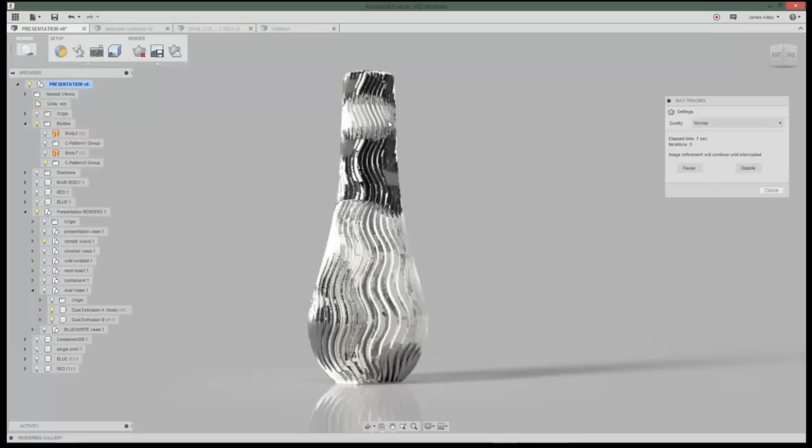So you guys can take pre-existing STLs and do some cool stuff with them, we can dive into this at the end. Let me backtrack on that, though. You really can't, at this point, but you can 3D print and dual color print in a different method. There's something called modifiers, which I can show you guys.

So basically, I'm going to add all these shapes in Fusion 360, and then I can import that into my slicer and tell it to print these sections in that color. This was done with Fusion, and also with a program called Autodesk 123D, which once I made the modifiers, I went in and actually did the Boolean combine on this. But I'm getting way ahead of myself.

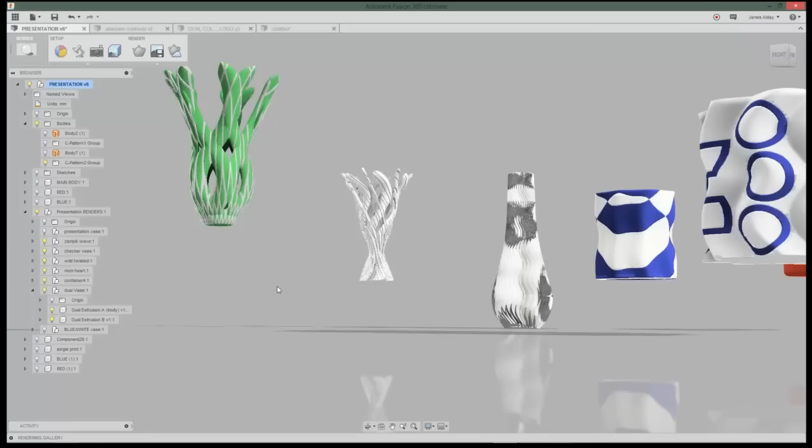Okay, so we covered the basics on how to do some dual color stuff. This is kind of what I was talking about with the weird shapes - these are just squares and circles, nothing fancy. And then the checker design - this was done with planes, several different planes at different angles, and just cut it up and organized each individual body into their appropriate component.

Pretty cool. All right, so let's go back to where I was, because I wanted to show you some more things with components.

Before you get into that, do you have an estimation of how long it would take to print the design that we made today? Not too long, because it was fairly small.

Well, actually, the size we made it was really big. You know what, let me go back to that, so I can show you some cool stuff we can do in that department. Cool.

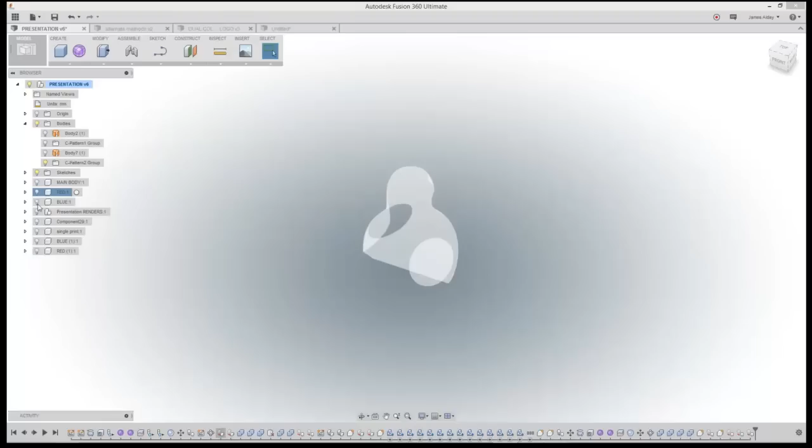So we have our main vase. I kind of wish I would have showed you this earlier before I got too far ahead, because my timeline is huge now. Basically what I was going to say is when we designated the sizes of our model, we based it on this sketch.

What's great about Fusion 360 is you can go back into your timeline - when it's not quite as large as mine, because I have a bunch of stuff thrown in here from organizing other things - you can go in here and make changes. Say this vase was 150 millimeters tall, single perimeter, 150 millimeters tall, it's not going to take too long.

Everything in printing takes forever, so that was a lie. But yeah, it's probably going to take maybe 3 or 4 hours to do because it's just single perimeter. Really not that big of a deal.

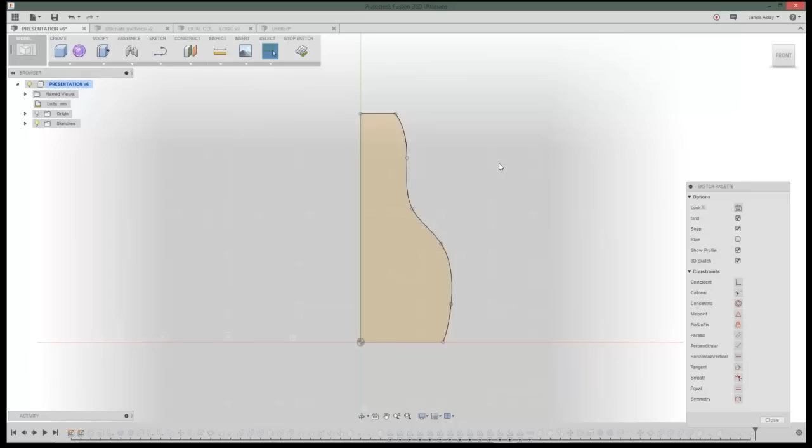Where's my vase? Okay, this vase in particular, because it was designed with so many perimeters and so many walls and shapes, there's a lot of surface area, so this one takes forever to print, much longer than I'd like. I think it was like 12, 15 hours, something like that. So it took a long time.

So ours, the one we just designed, fairly simple, one perimeter, one wall, one surface, shouldn't take very long. That kind of answered the question, I guess. Yeah, that's perfect, thank you. It's good to just have an idea of what kind of time commitment you have for that.

Yeah, it's not that bad, but everything in 3D printing nowadays takes a long time. Right.

All right, so on that note, if the vase did take too long - you're like, man, this vase is just too long, you loaded it into your slicer, and you're like, oh, I got to go to work in 6 hours, I want it to finish - you can always shrink stuff down in here. You can change the sizes, you can manipulate it, and it'll change everything for you.

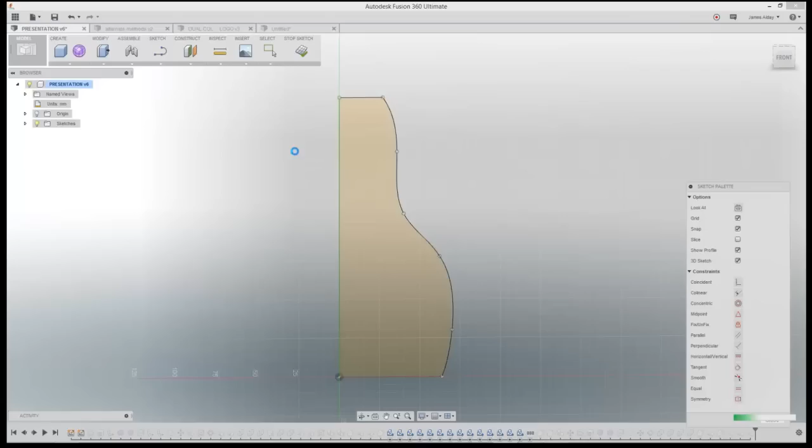Another thing - let's say you printed it and it did 3 perimeters, and you're like, well, I could definitely speed this up by making it 1 perimeter, and that way there's no infill. You can easily do that by finding where we shelled it, and you can just quickly change the shell.

It's quick if you don't have a bunch of stuff loaded in like I do. Quickly change the shell to something else, maybe change this 1 to a 0.5 to cut the base in half. Or if you wanted to scale, say print this at 50% but still maintain the 1 millimeter diameter or the 1 millimeter perimeter, you can change this to 2 perimeter or 2 millimeters and then shrink your STL down 50% in your slicer. That way you still maintain all your settings. So Fusion's really versatile. You can go in, especially working with prototypes, and keep everything exact the way you need it.

Okay, I've completely gone off track now.

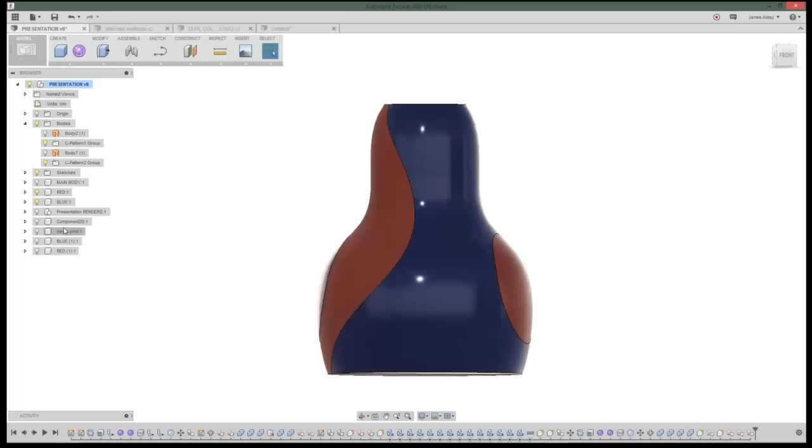So basically, I wanted to touch base a little bit on components and bodies. Very important when doing dual extruders, and just kind of important in general, especially with the setup. You want to try to keep everything in components. Components are going to enable a lot of features. When you have something in a component, you can start dealing with assemblies. Once you guys get a little more advanced, you can move the shapes around and then snap them back into place, which is kind of cool. Maybe there's times you need to see what's going on inside a model. You can just move it, do what you got to do, and revert your shapes.

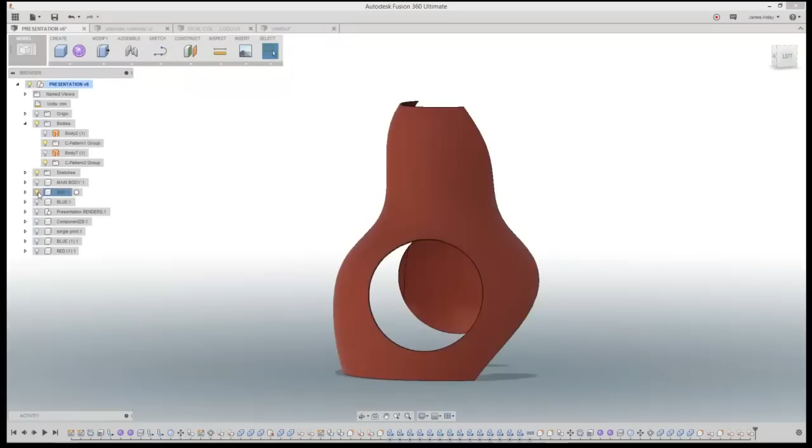Bodies, you can't do that. Let's see if I have a body on here. I think I used all my body stuff already, so there's nothing there. But if you have a body, you can't do anything with it because it's not assigned a component yet. You can actually physically click it and move it by right-clicking and saying move, but that's too much work.

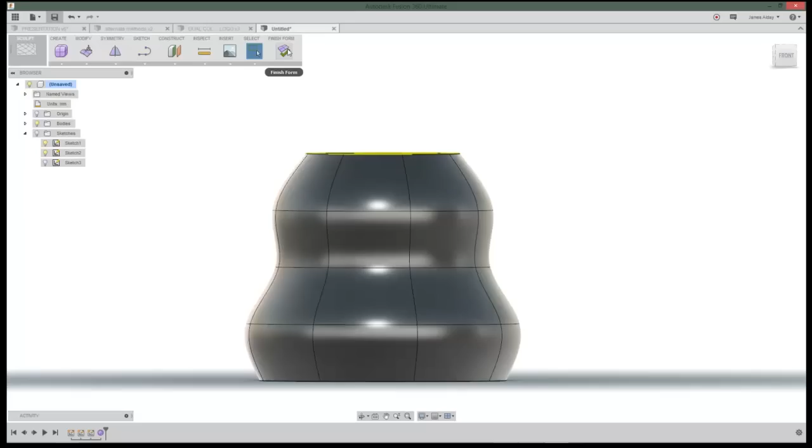All right, so I'm just going to do a basic shape real fast. Basic box. All right, cool. So you've sketched something really neat out, and you're wanting to do something creative to this surface. In the past, I was limited to chamfers and fillets, which are both amazing, cool tools, lots of features, but we want to do something cool to the surface.

If we go to Modify, there's no Edit Face. This confused me in the beginning because I was like, well, where's that cool Edit Face tool? To do that, we're going to turn this into a direct model, convert to a DM feature, which basically means you're going to go into direct modeling mode. It's going to disable temporarily your history. So go ahead and convert that to direct modeling mode. And now if you double click on that feature until you see the Finish Base Feature option pop up, that lets you know that you're actually in that direct modeling mode.

Now we have Edit Face available to us. Edit Face is awesome because we can click on this face, click Edit Face, and it's basically going to throw like a T-spline plane on top of the surface. We can subdivide this. We can do lots of cool stuff that we did before, how I showed you how you can revolve stuff. Let me, real quick.

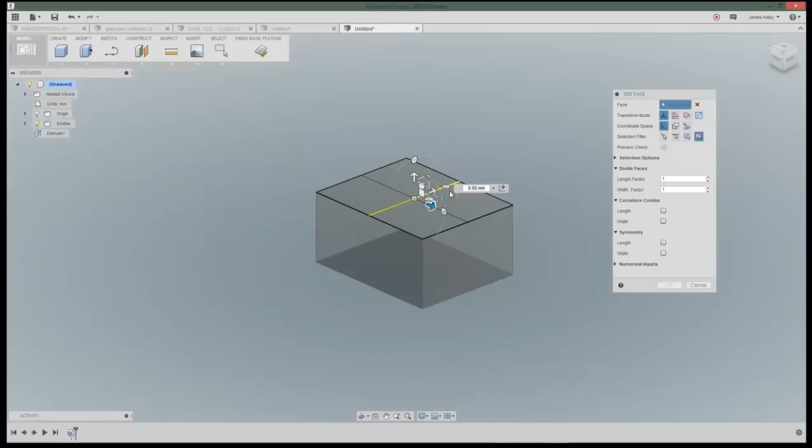Just do a really cool creative shape and hit OK. What it's going to do is take your box or whatever shape you're working with and cut it, conforming that surface to the shape of the spline we just created. With this technique, that's how I was able to do the cool surface areas of the bow, and there's lots of interior artwork I've done where it's basically trim on ceilings and stuff.

That's really awesome. It won't take this long to load, by the way, I just have too much stuff open. Oh nice, real quick I'll show you again. Nobody saw that, this will work out perfect. No, it's my fault because I have too many presentations open. This one will work out great though because I have a nice, fresh start.

While you're loading that, could you answer one last question before you show us that and we call it a day? And that would be, what advice do you have on how you would normally split up a single color component that's too large to print?

Perfect, well I actually have the screen open right here. So this is an example. I sketched out this, or I made the bow basically, and I needed it to fit on my 3D printer. So what I did was, in the very first exercise, we did the 200 by 200 millimeter square, the sketched out square. So I basically hovered that around the model to figure out where my printer bed would fit best around these pieces.

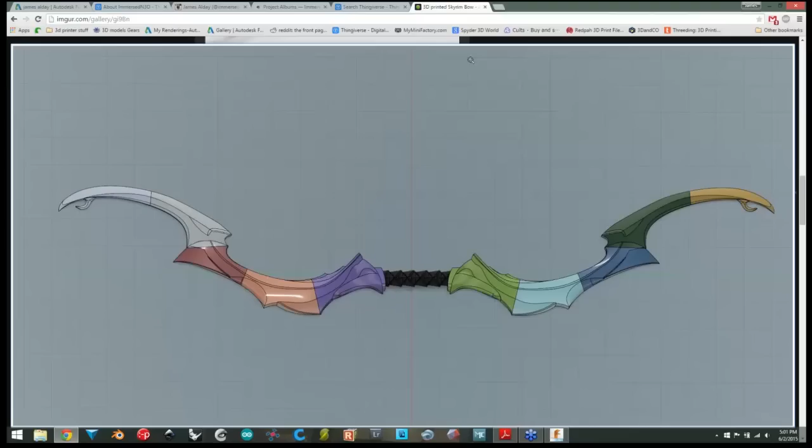Once these were all cut up, I exported them all individually into their own component, and then exported them as STLs. So it's a really quick, simple way just to break this model up into manageable pieces. I could have got really creative, which some other people have already done on Thingiverse when I uploaded this, and made these with little squares in them, notches or whatever, so they would conveniently fit into each other.

So I think that's the simplest way to do it that way. Perfect, okay let's try that real quick again. This time it's going to work.

Okay, so convert this to direct model feature. Double click on it to make sure you're actually in there. When the Finish Base Feature comes up, edit face, select the face. Do something to it, hit OK, and there we go. So very cool, so you can sketch out people's names, you can sketch out cool designs, and then go through and do some creative, organic, surface texture.

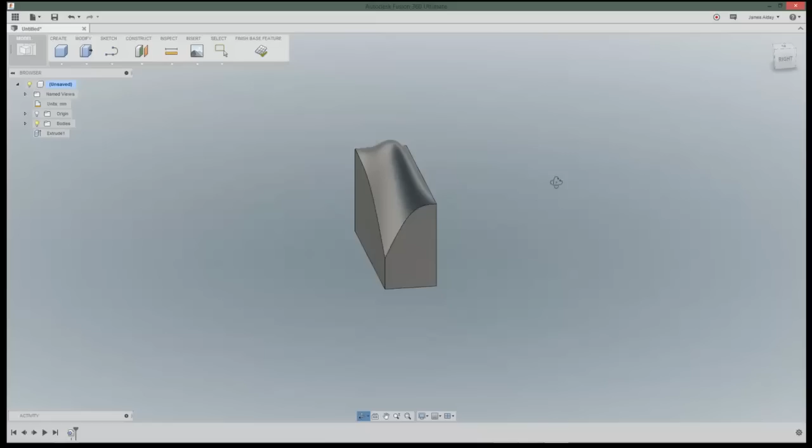From there, you can hit Finish Base Feature, and then continue along in your project just in normal history mode. You can always go back to that too if you want - double click on it, and you can even re-edit that surface, which will give you the ability to re-edit that face. The surface you're working with now, of course, is going to be a little more complex, but you can still go in here and do some cool stuff.

All right, so that was really the only other really cool tool I wanted to show people because I think it's awesome, especially for 3D printing, because you're going to be left with a giant surface down here on the bottom to stick to your bed, so you're not going to have lifting issues, and you can still create some really organic, cool surface features.